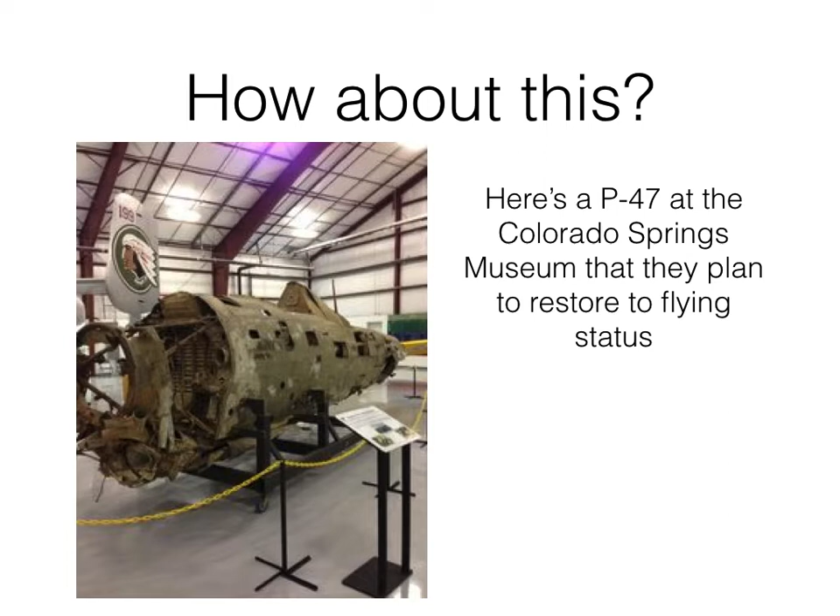Well, how about this? It's a P-47 down at a Colorado Springs museum that they plan to restore to flying status. Think restoring is easy? Well, are they really going to restore this thing? Sorta. They said they'd use about 10% of it. So what's the answer? Well, there really isn't one.

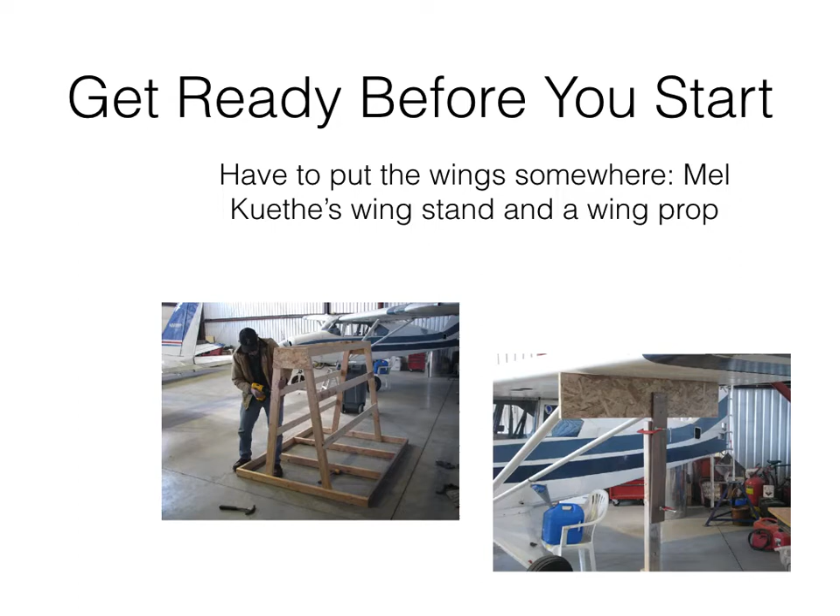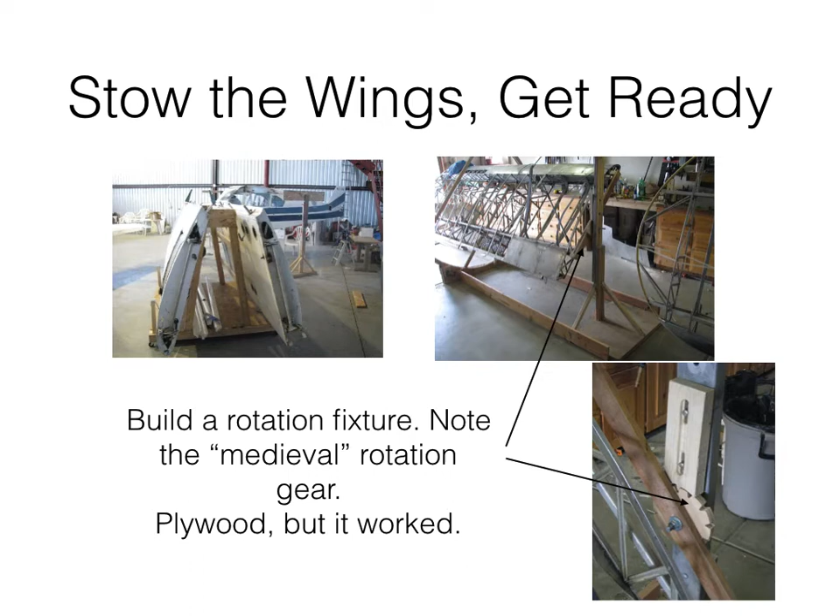Well, with the wings stowed, I built a rather crude rotation fixture that I used for both the wings and the fuselage. I made what I called a medieval gear out of plywood that would hold the wing or fuselage in the position I wanted. I started with a sheet of 1/2 inch chipboard, you know, the kind of plywood that's used on roofs and walls of houses. It was somewhat flimsy, but it worked. If I had it to do again, I'd use 3/4 inch plywood.

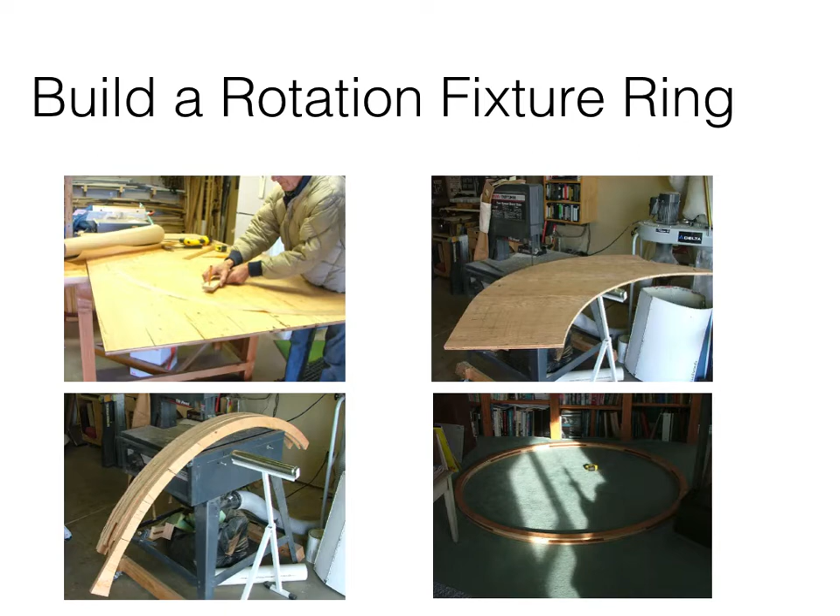I laid out the arcs for the circle, cut eight arc pieces of the chipboard on my bandsaw, then screwed them together with drywall screws. By offsetting each circle 45 degrees with respect to the other, plus some spacers, the resulting hoop held together and was 1.5 inches thick.

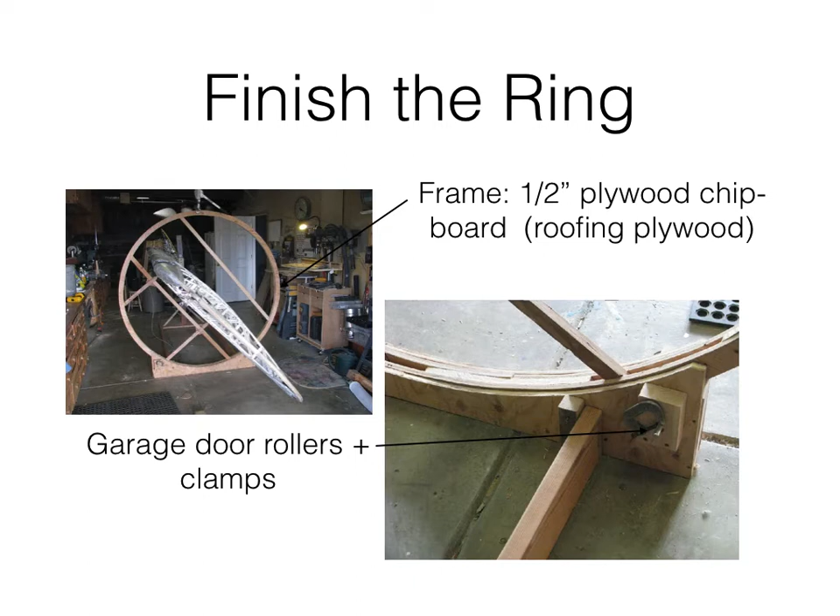I built a support for the ring, which would allow it to be rotated. I made the support too small the first time. Ralph Katowski, who restored his award-winning Tripacer before I did mine, sent me some comments. I made it bigger, and it worked. The lesson? Don't ever hesitate to ask somebody who knows more than you. The support was pretty simple. Some plywood, garage door rollers, and a few clamps to hold things in place.

Finally, what this presentation is all about, the restoration. But wait, as I said earlier, we have to tear everything down before we can restore anything. Now starting hurts some. You know, that first cut, do I really want to do this? Well, you do, and then it gets easier.

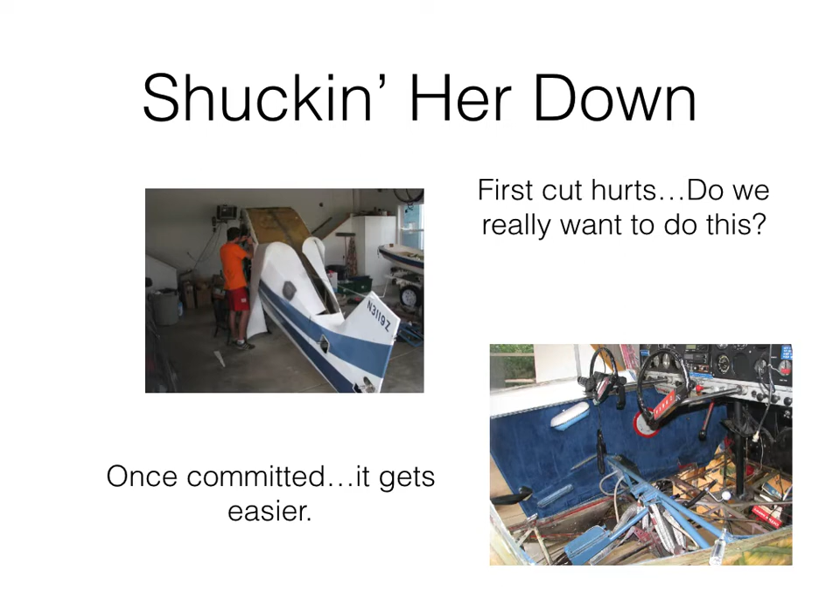It used to look like an airplane. Guess it sort of does. Stripped down to the frame. The good news? Little or no rust, even after 50 plus years. Fortunately, the airplane lived much of its life in the dry western United States.

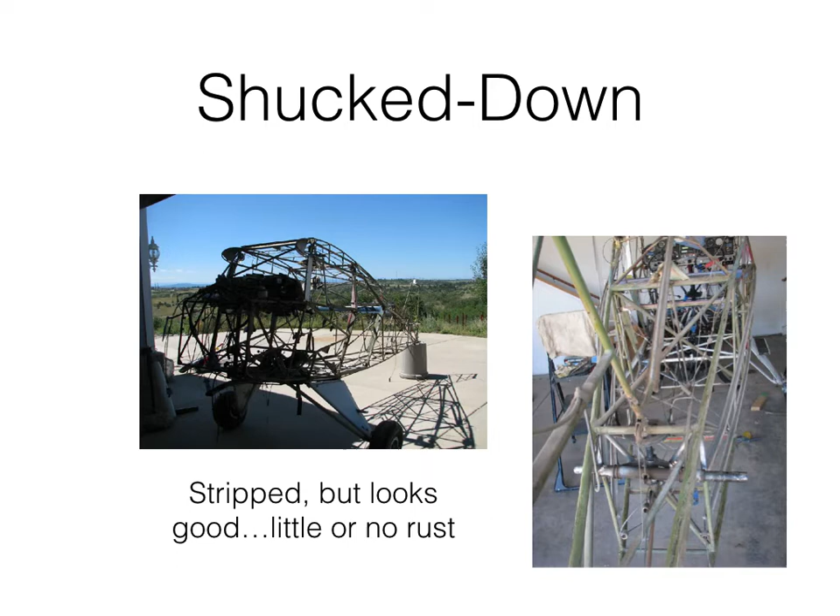We all want to get to recovering, painting, and finishing the airplane, but not so fast. Restoring an airplane is mostly about getting ready, and there's a lot of getting ready to do.

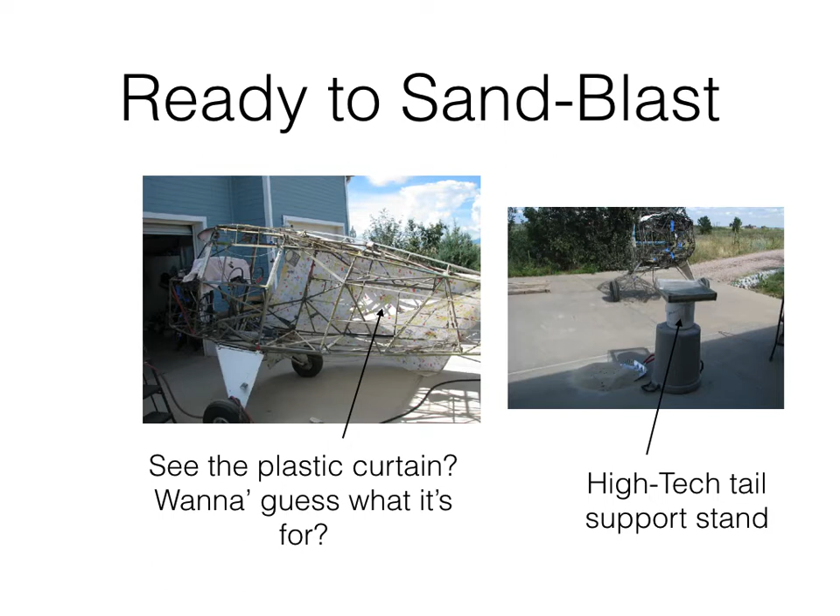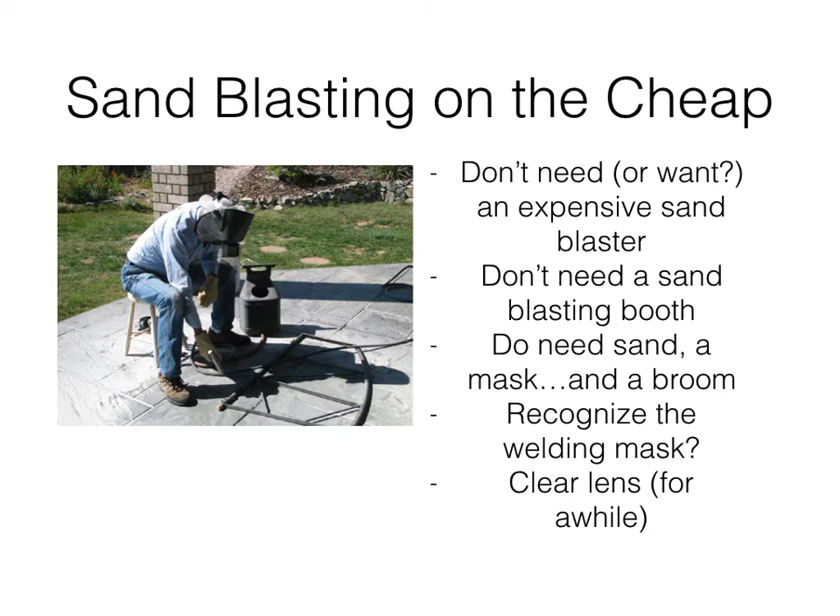You'll likely do a lot of sandblasting. What do you need? Not much that's fancy. Just take your time, remove what you need to remove, but remove as little good steel as possible. You need a broom? Well, of course, you got to clean up and maybe reuse the sand. Okay, the fuselage is sandblasted, clean, and ready to prime. You'll need a paint booth, but not yet.

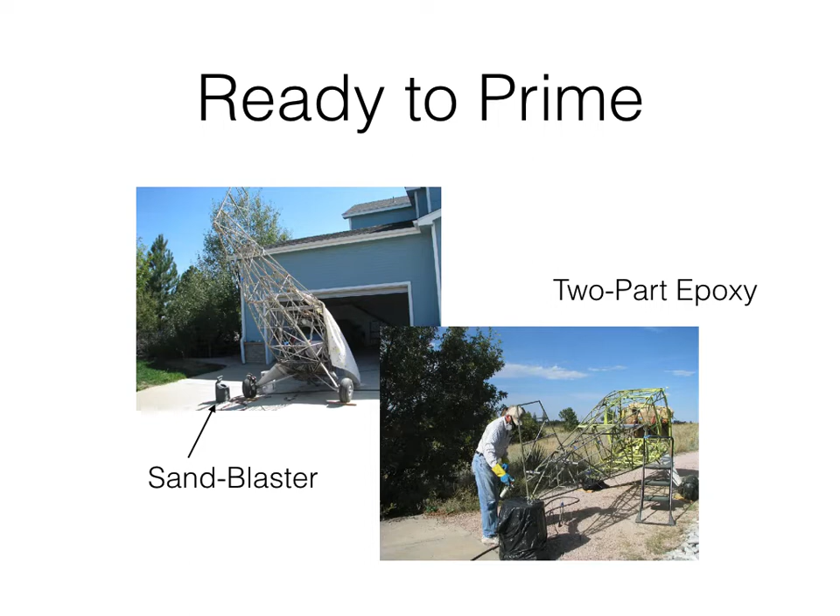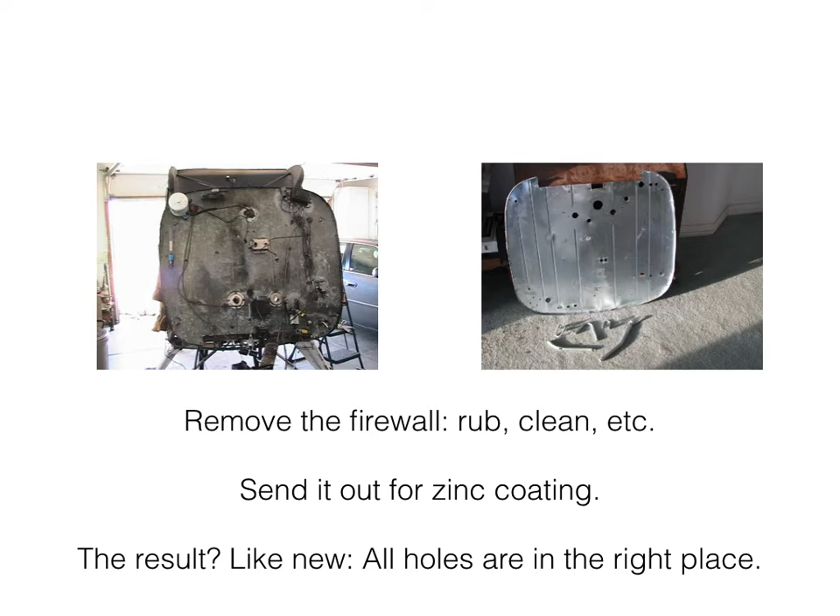We're ready to get on with the real restoration, or are we? Nope, not yet. I think that the majority of the restoration time is spent rubbing on things, scraping, cleaning, sanding, brushing 50 years or so of schmutz off of the parts. The left-hand picture shows the dirty firewall still on the fuselage. I cleaned it, then had it zinc coated. Same firewall, but looks like new. And of course the holes are all in the right places.

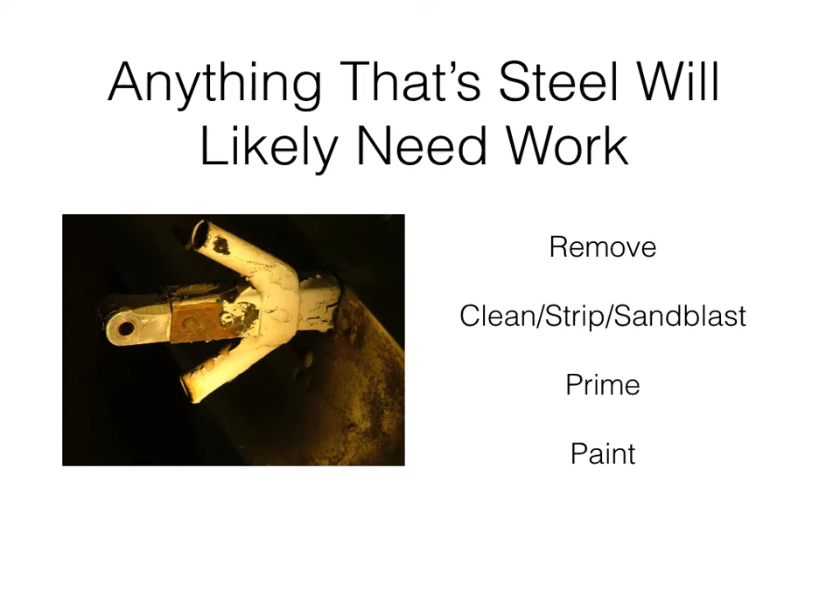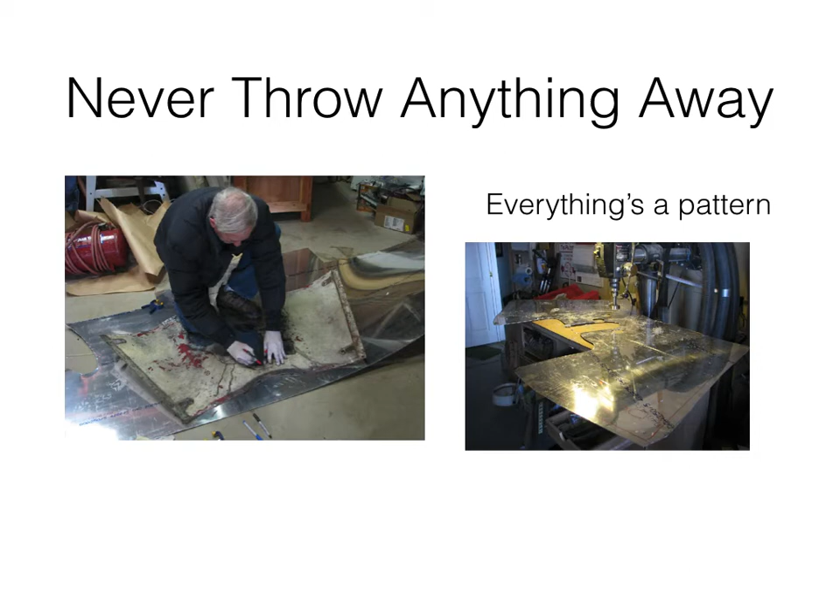Here's the aileron angle limiting horn. It needed work, just like almost anything that's steel on the airplane will need some work. But after sandblasting and refinishing, the part was just fine. Unless you buy new metal parts, you'll make lots of them. A good thought. Never throw anything away. Everything's a pattern, including the fabric you took off the airplane when you started. The fabric will show you where the holes are.

Here's the landing gear. More to strip and paint, and it has on it a wheel fairing attachment that I designed, did a stress analysis for, and got a 337 approved by the FAA.

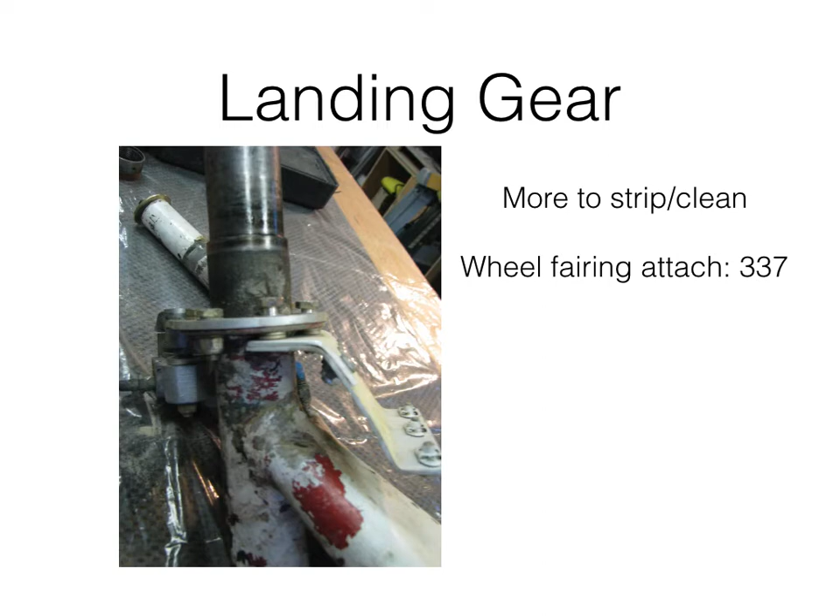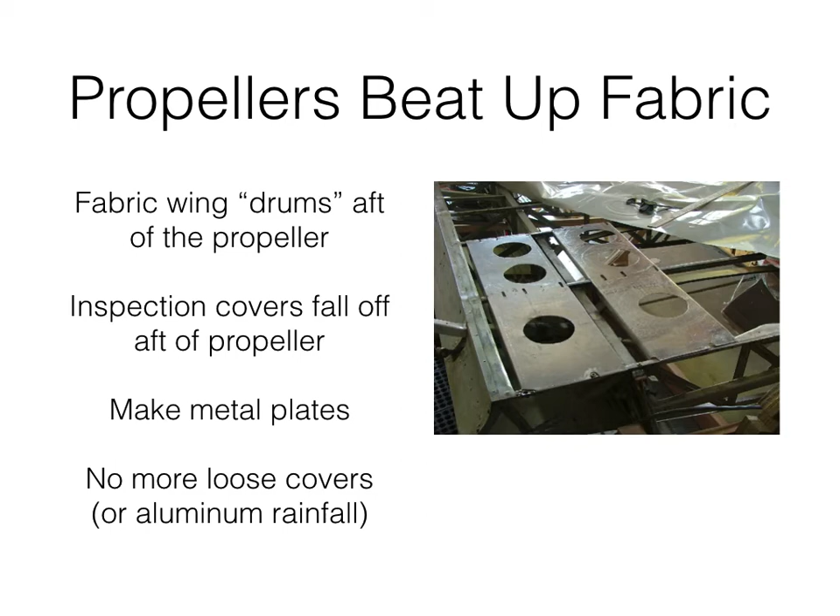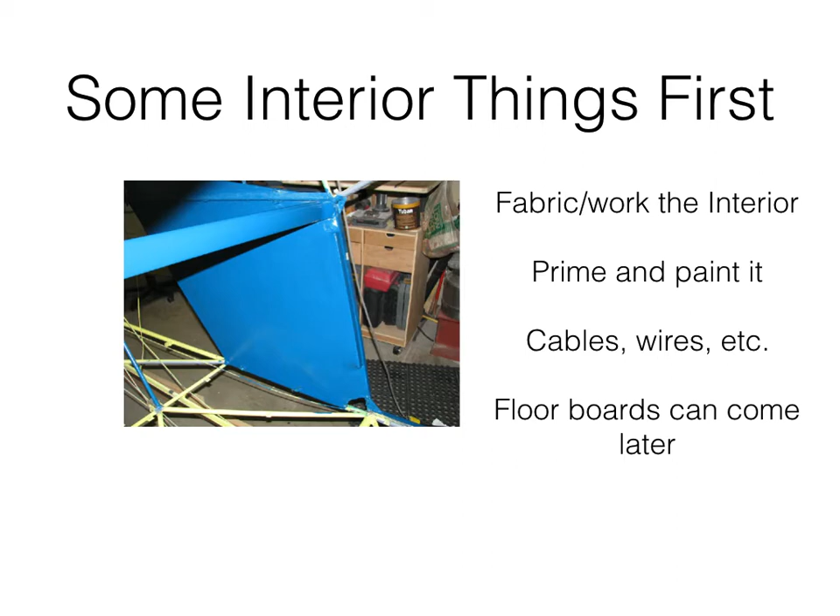A thought. Don't hurry to do the exterior. You'll want to work on the interior while it's accessible. You need a sink in your shop? Well, of course not. It's not absolutely necessary, but it sure helps.

The airplane had made many lousy landings. I likely made most of them, or certainly a lot of them. And the landing gear attach bolts were bent. Sure did trash the main landing gear getting it off. But I cleaned it up, made new trailing edges, primed it, painted it, recovered it. Looks great.

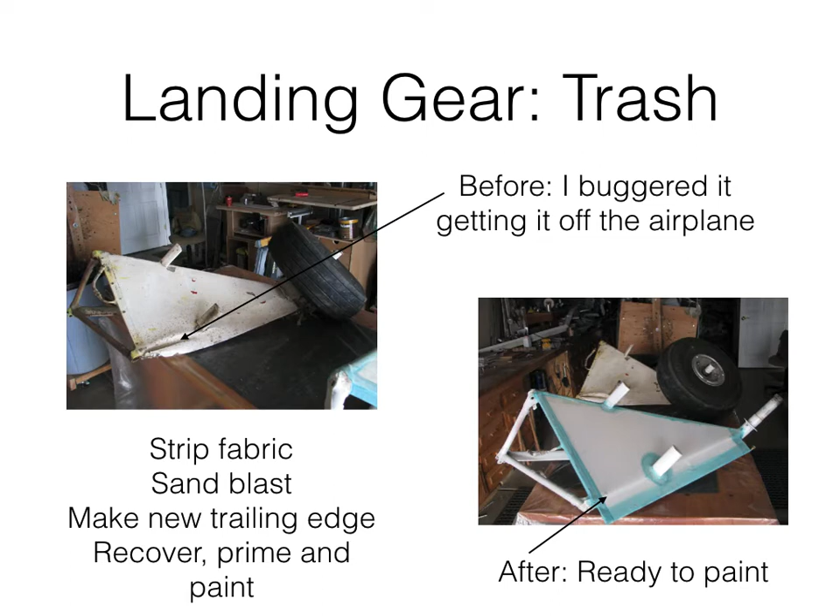Along with the obvious necessary tools like clecos and such, here are some of my favorites. Spade bits. The bit that's used to drill holes in 2x4s to pull electrical wiring through and such. Really? Well, it turns out that the points on the bit don't crack plexiglass. You just need a hole a little larger than the bolt or screw you use. The pointy end of the spade bit works just fine.

How about a Forstner wood bit? Sure. It's great for drilling holes in 2024-T3 aluminum. A Dremel tool cuts aluminum and plexiglass really well.

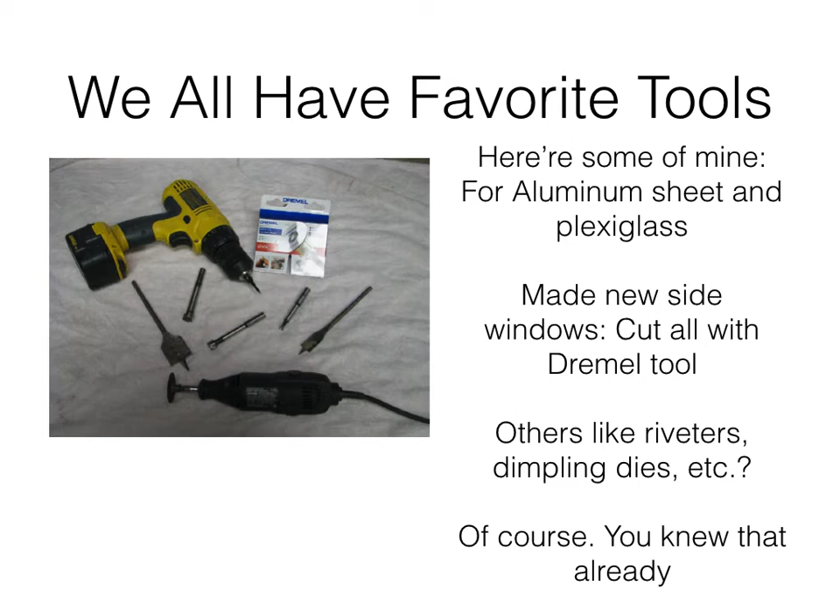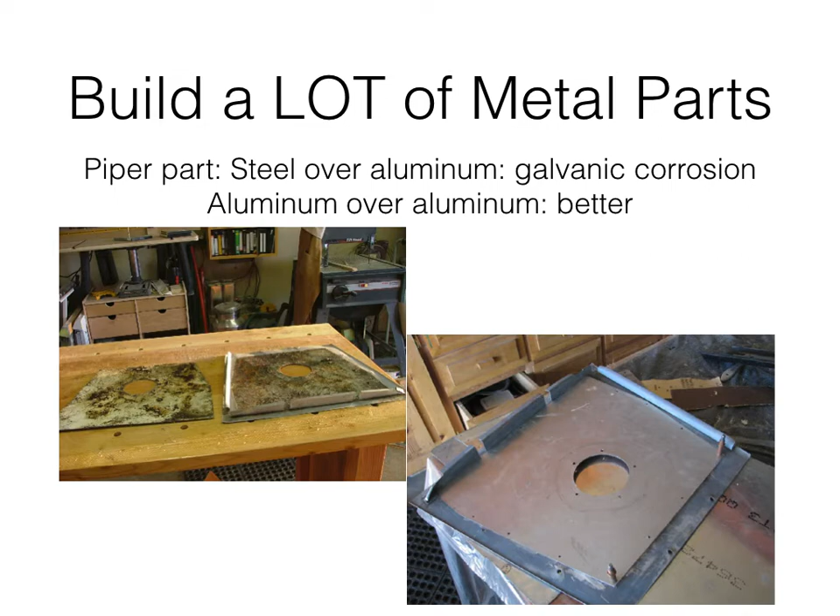As I said earlier, you'll make or buy a lot of metal parts, even on a so-called fabric airplane. Here's the access panel on the bottom of the fuselage. On the left, a bad idea: a sheet of steel on a sheet of aluminum. Galvanic corrosion. As you can see in the picture, yeah, it happens. On the right, a better idea: aluminum on aluminum.

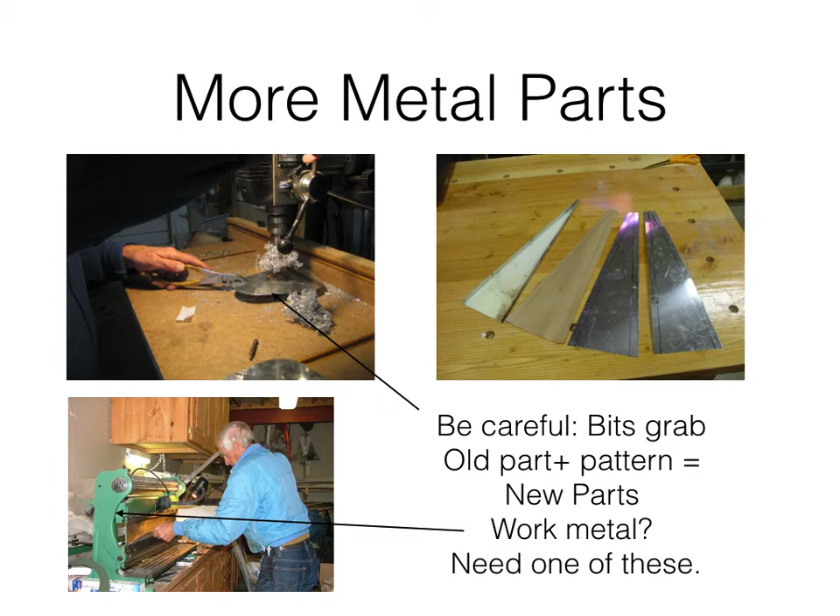When you make parts, you'll drill a lot of holes in them. You'll only hold onto a piece of aluminum while you drill a hole in it once. Bits grab. Hold onto it with something besides your fingers. And as I said earlier, old parts equal patterns. And the tool from Harbor Freight and other suppliers that shears, bends, and rolls metal is really handy. I used it a lot.

We say that we fly fabric airplanes, and that's true. But there's a lot, did I say a lot, of metal on our airplanes. Here it is in the two pictures. I made most of the parts that didn't have compound curves, where the metal bends in 2 or more directions.

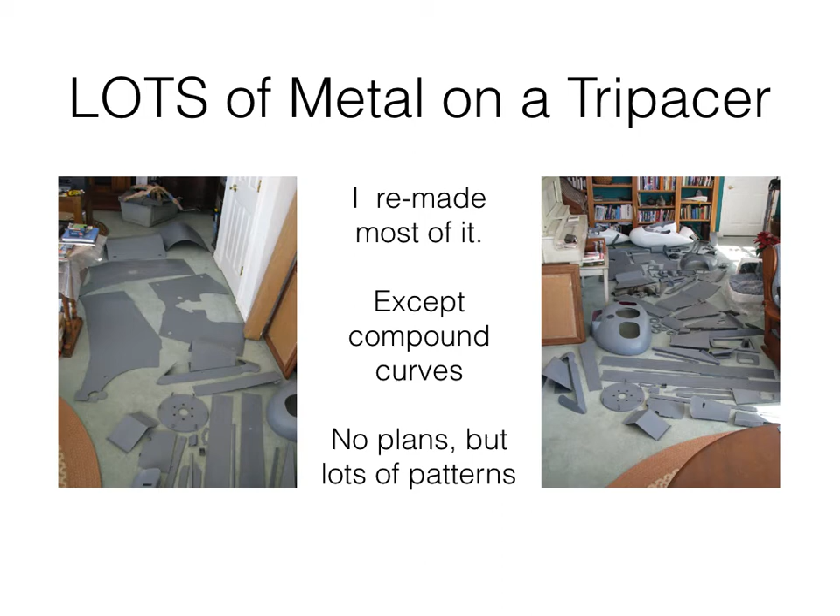There's a vinyl liner on the inside of the firewall. I bought a new one. It was black, wrong color, so I painted it with Stewart Systems waterborne or water-based paint, they call it both, people call it both. Just like everywhere else, it adhered just fine to the vinyl.

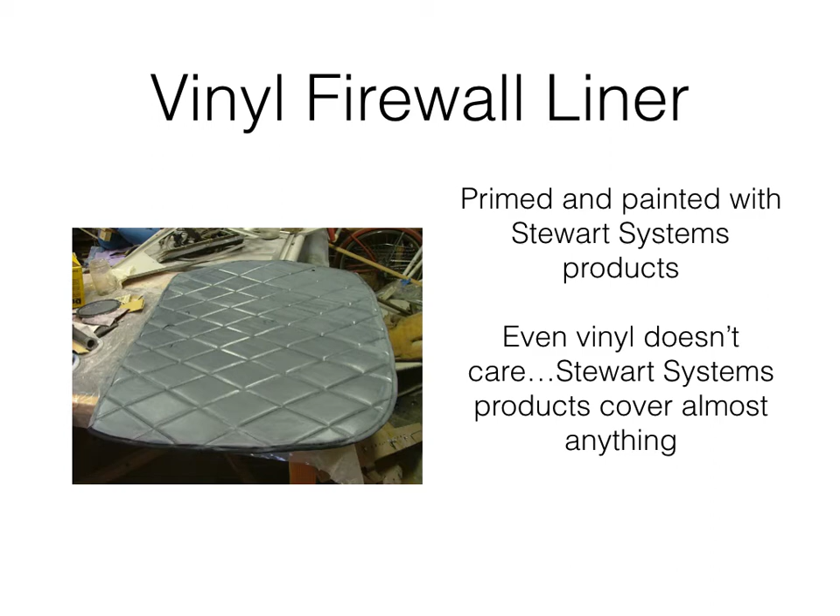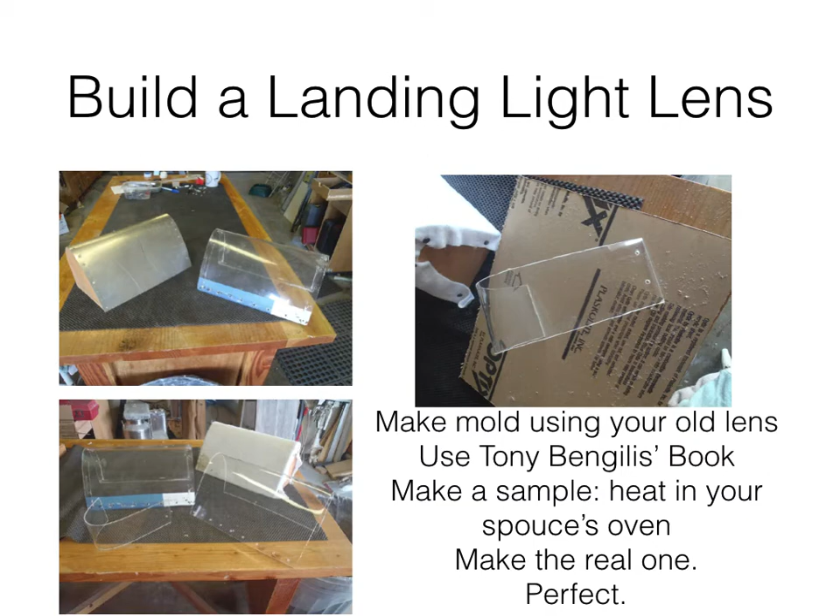You have a plexiglass landing light lens that's pitted and maybe yellowed by now. So why not make a new one? Use the old one as a pattern and make a mold. It's on the left in the upper left-hand picture. Then make a trial piece. You sneak it into your spouse's oven, heat it until you can bend it around the mold, and then you bend it. Turn out good? Yeah, it did. Okay, make the real one. It's quite easy.

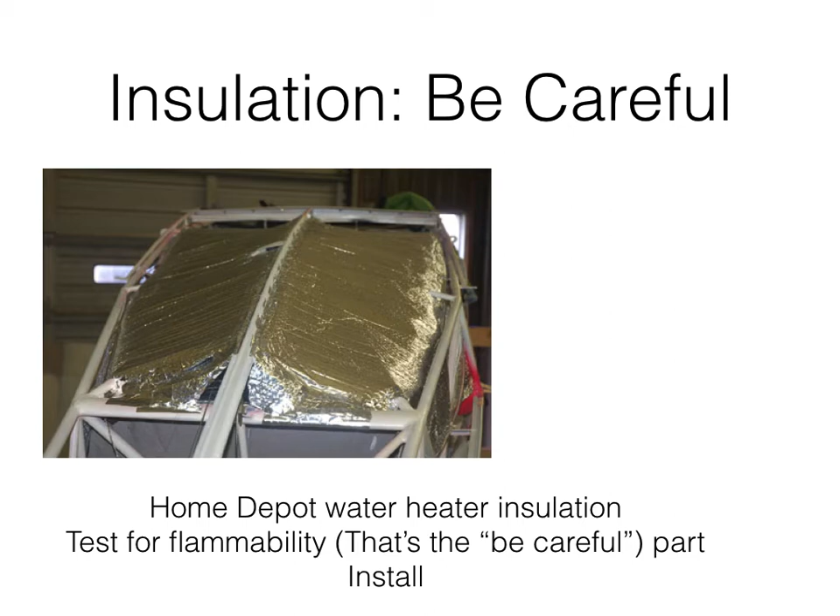Well, you get to pick the finish paint, colors, and whatever, and there are many good finishing products. I would never, ever even think about using dope, but some people do. I use Stewart Systems. It has no methyl ethyl ketone in it, and I would never, ever even think about using anything but the water-based, waterborne products.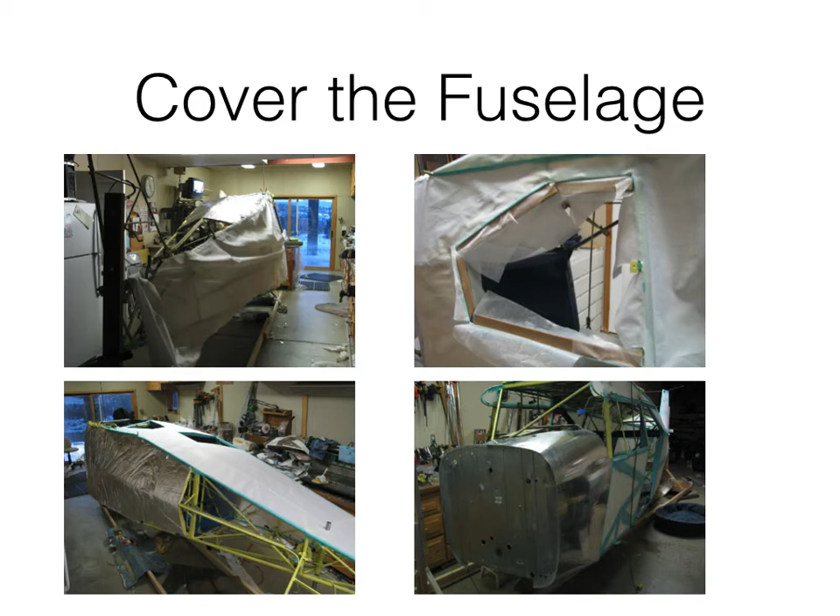The wing's not much different. I did put white felt on the leading edge under the fabric. Made things smoother. I liked it. And I also built the small tent-shaped fairing in the lower left-hand picture over the aileron cable.

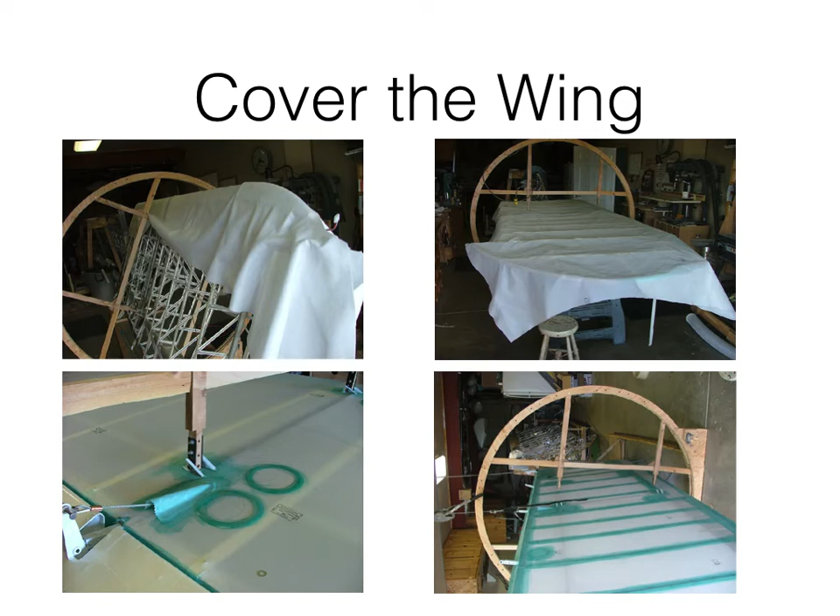Sometimes you really do need a paint booth, but not always. Primer doesn't care too much about dust. But here's where you do need a paint booth. This one's made of 3/4 inch PVC pipe and 4 mil plastic sheeting that we often call Visqueen.

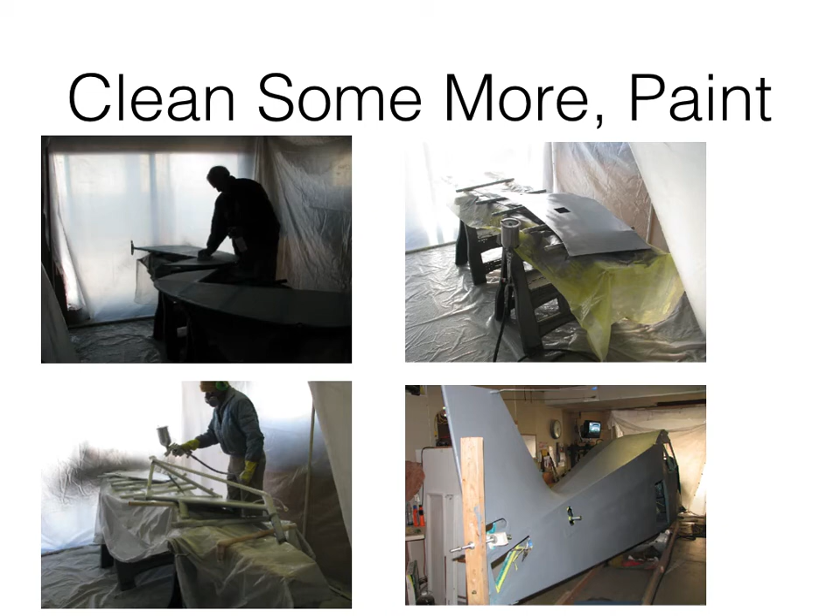When you put the PVC pipe together, don't glue it. The joints will hold just fine without glue. Then you can take them apart, store them for future use, give them to a friend, or whatever. Use masking tape to hold the plastic sheets together. You can then reuse the plastic sheets again if you so choose.

Parts, including a wing or fuselage, are painted in one session using the waterborne paint. Paint a fogging or misting coat, wait 5 minutes, turn up the paint flow on the gun, spray it again. You test it for tackiness. You want it to be tacky before the next coat. Not dry, but tacky. So you test it with a finger. When the paint's no longer wet, spray it again.

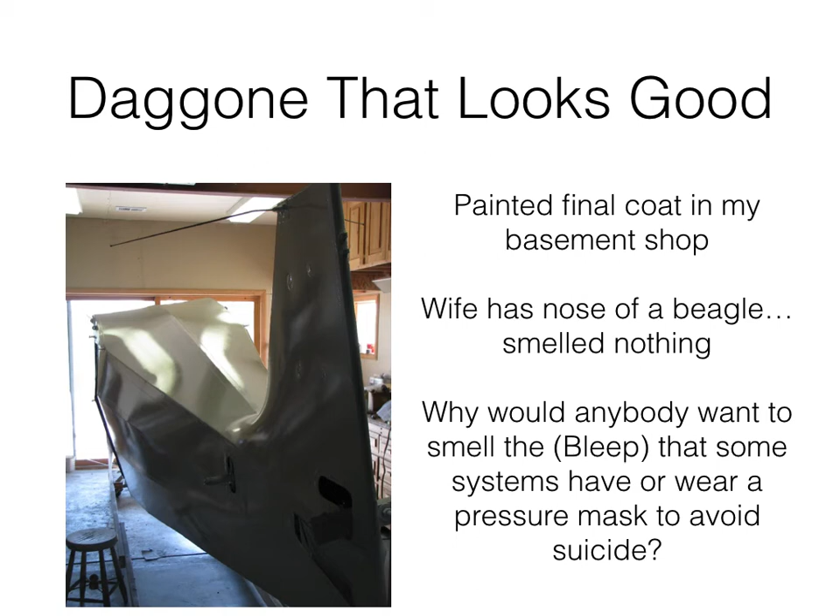On the 4th coat, magic happens. The paint flows out and glosses. It takes about 45 minutes to an hour to do a wing. The white smears on top of the fuselage in the picture? My shop ceiling light reflections. Daggone, that looks good.

Dressing up the metal instrument panel makes it look really good. I used the same paint for the panel that I used everywhere else. Worked just fine.

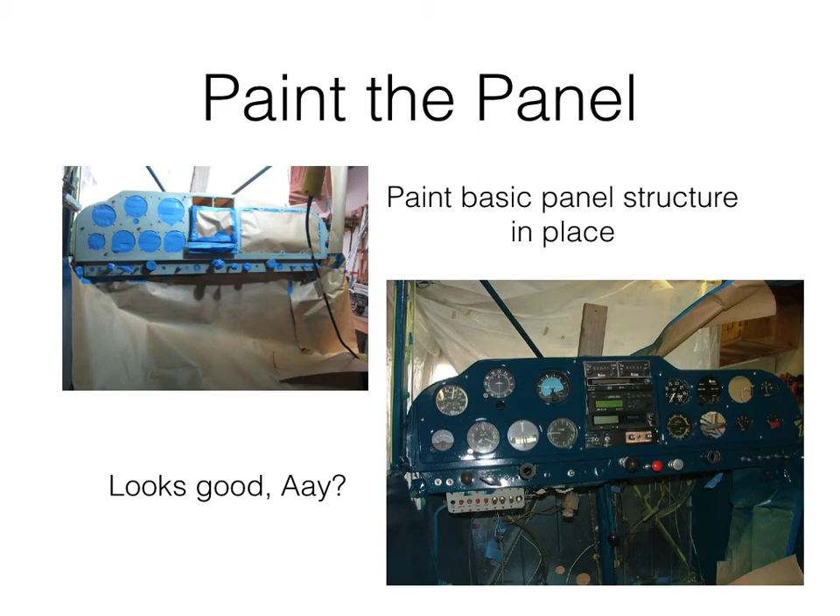As I said earlier, sometimes you screw up. You won't make a lot of mistakes if you've restored a few airplanes. If this is your first, expect a lot of mistakes. I sure made a lot. Here's one. I ran out of primer, so I called Stewart Systems and asked if I could use automotive primer to finish a part of the job. They said, sure. But I didn't wait a long time before I shot the top coat.

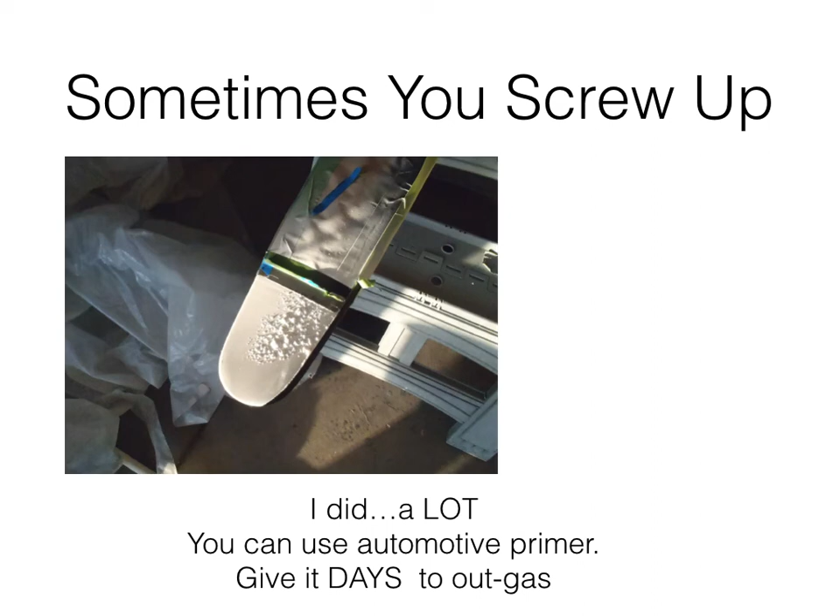These primers have volatile organic compounds and they outgas for a long time. This is what can happen if you don't wait. You get to do it over.

Use your own expletive to describe the difficulty of installing a headliner. I found it really difficult and certainly used a lot of expletives, likely some I didn't even remember I knew. Hardest thing I tried to do in restoring the airplane. But it did turn out well, and so the expletives really weren't needed.

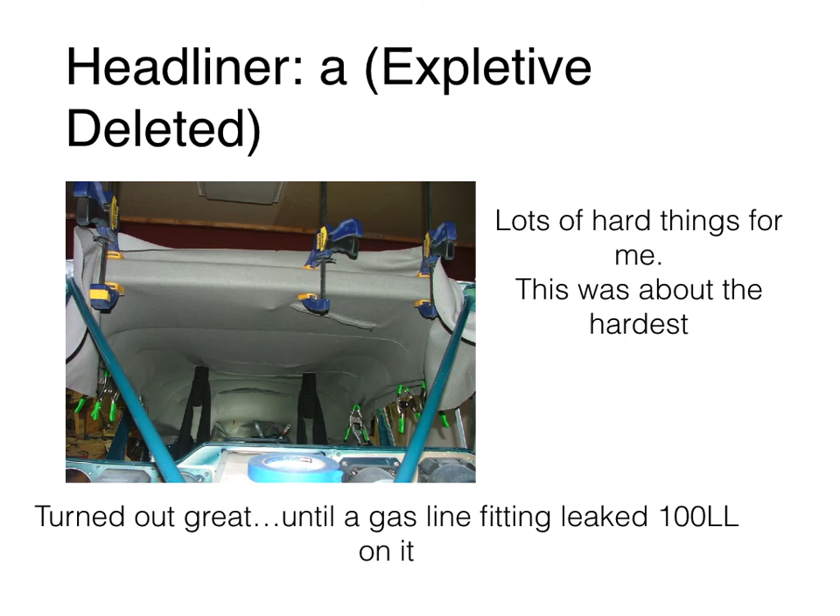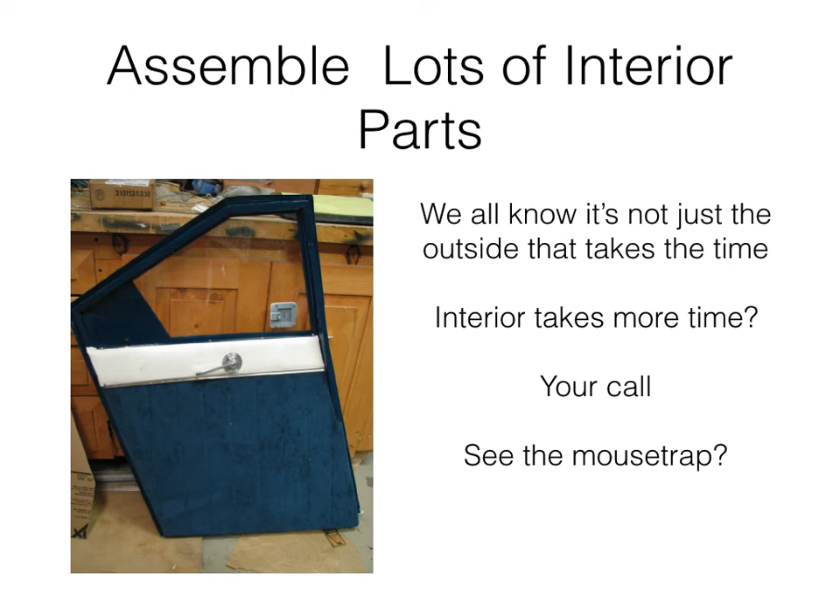I had an automotive seat covering company on the airfield do the seat and door covers. They even understood aircraft paperwork. Okay, here the fuselage is painted in my shop and the landing gear fits, and it has new bolts. Good idea to use new bolts anywhere there's significant structural loads, of course. Took the gear back off to move the fuselage out of the shop.

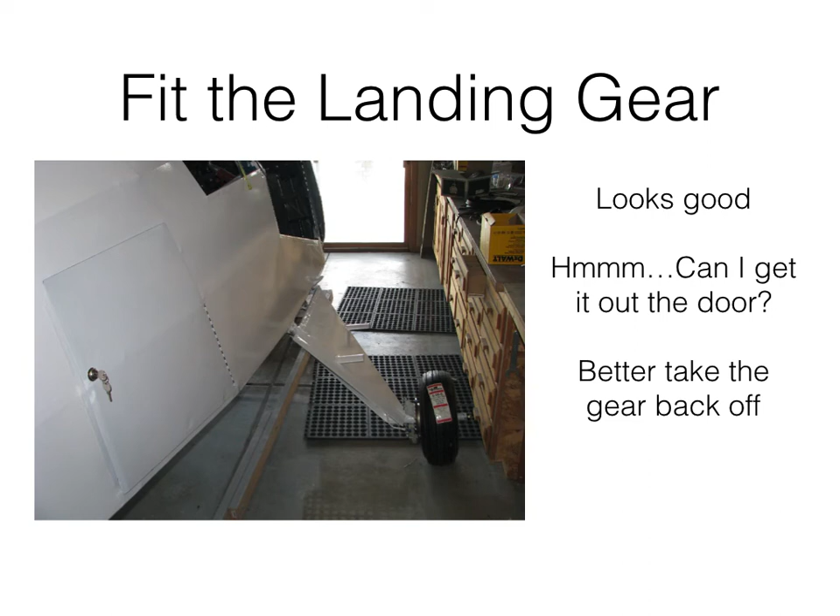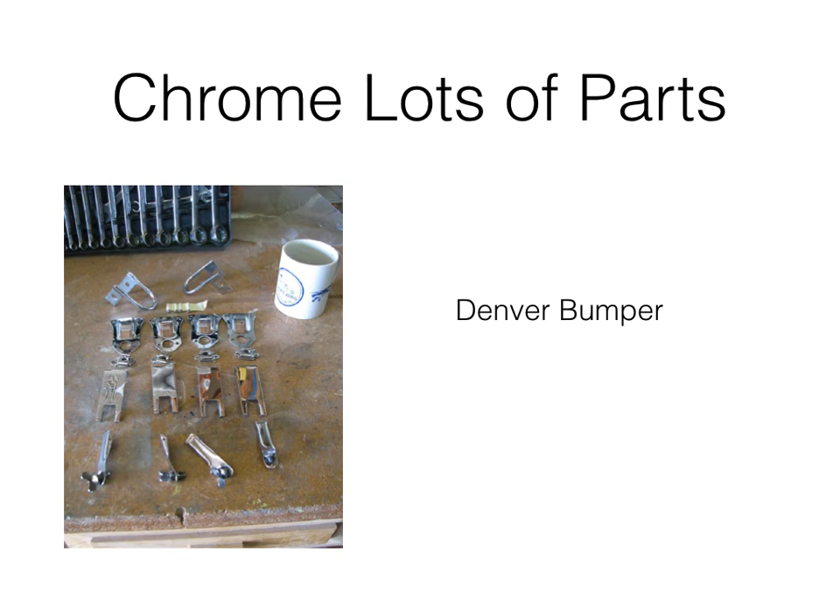You'll want to chrome plate a lot of steel parts. A local bumper shop can do the job. Putting the metal parts you make together can take a lot, did I say a lot, of fitting, filing, pulling and pushing, and some more expletives.

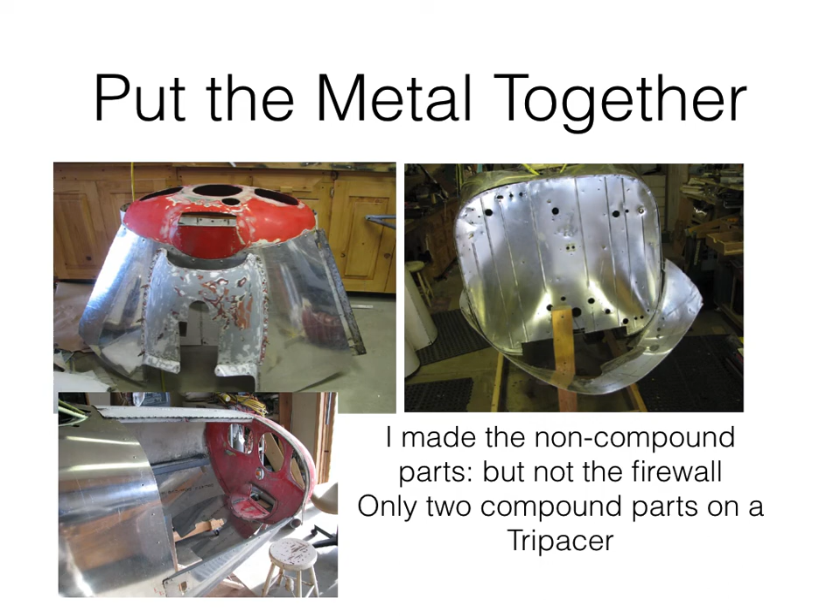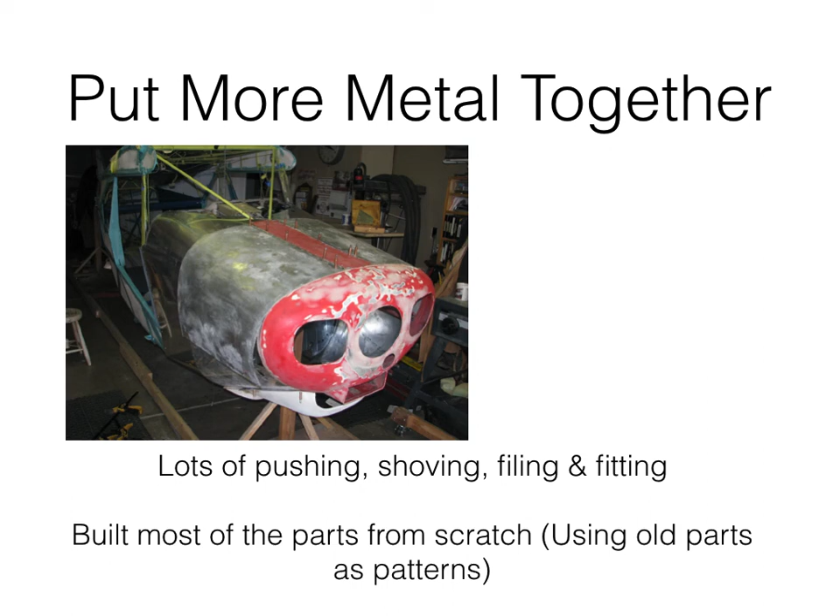Here's the front end aluminum coming together. You can see, of course, that I didn't try to rebuild the nose bowl or the chin underneath the engine. These are the parts with compound curves.

Okay, the old joke, can you get it out of the basement? Of course. The door to my shop was 1 inch wider than the fuselage, giving me roughly ½ inch on each side. I got it in, so I should be able to get it out. Quite a procedure to get it out, but I did.

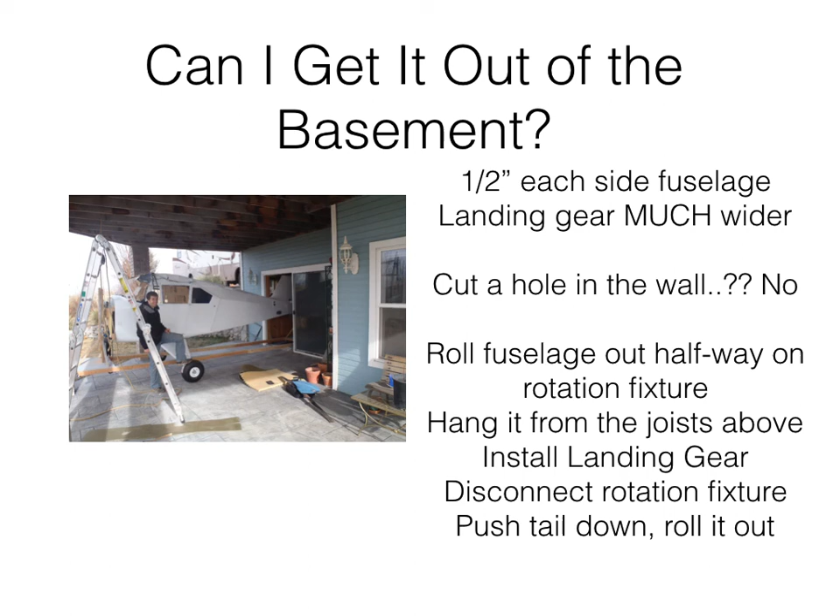I painted the trim at the hangar. If you want to put swishy stripes on it, as I did, you'll need a large French curve. I used a piece of rubber or plastic weather stripping, the kind that's on your front door, perhaps. When it was taped where I thought I wanted it, I traced its outline with a pencil, masked the airplane with clear plastic, then painted the trim.

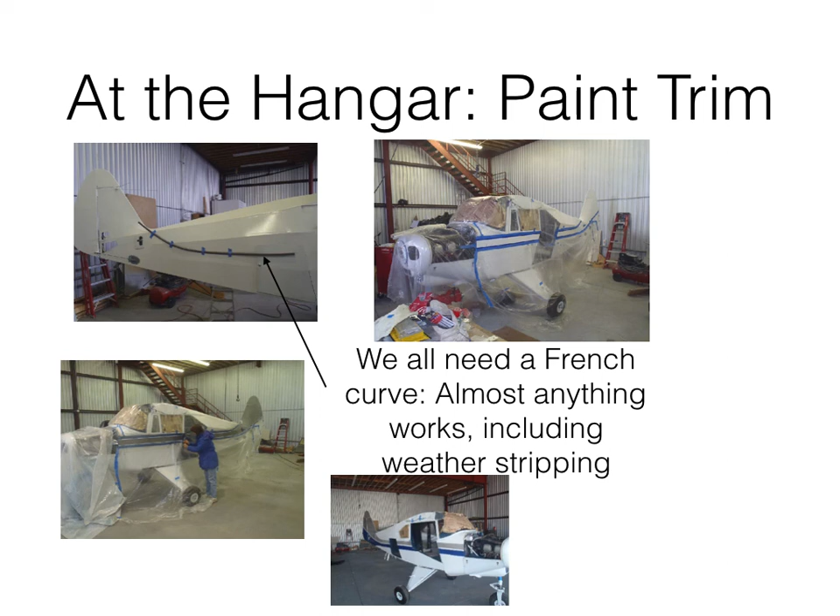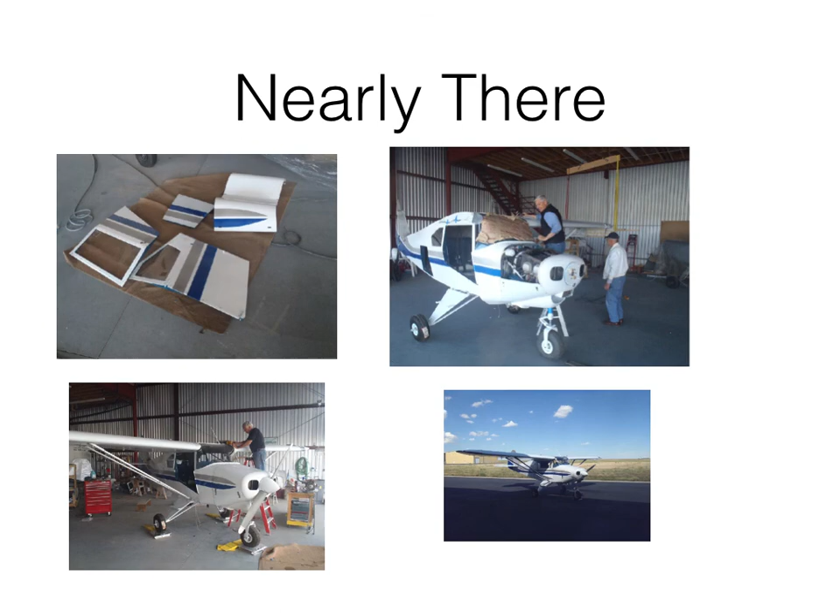Hey, we're almost finished. It's all coming together. Two of my friends, both A&Ps and one with an IA certificate, are in the picture putting things together. Jim Edwards, my flight instructor with the IA certificate, the owner of the hangar, made the first flight for me. My bride was relieved. Finished.